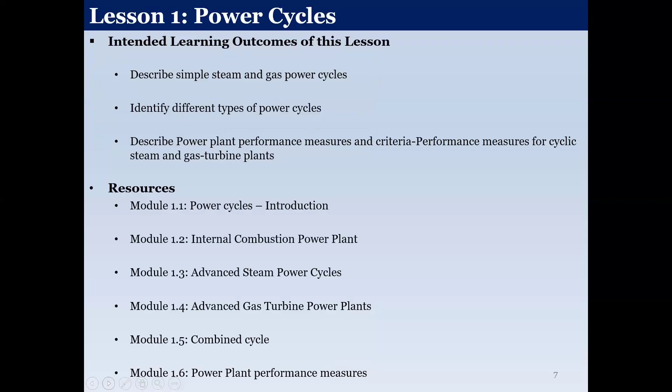And if you go to the learning outcomes, I don't want to tell you all these things again repeatedly. I think I have already told you about these things. So we'll move on to this one. Now here you have the first one, the power cycles introduction. You have all these things. If you go to this link, you will find something like this, and you have this arrow here. You can go to the next one and proceed from there, or you can see the course material.

Introduction to power cycles. Inside this, it's kind of a video, not really a video, but you can go slide by slide and see what is inside and then go to learn about the basic concepts, okay? So then moving on, here I think I have told you about these things also.

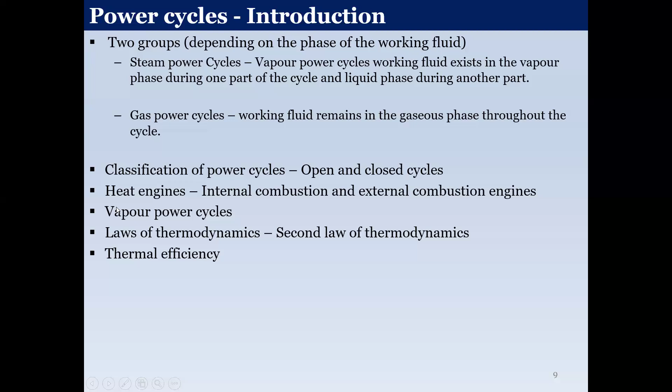And other than these two, we have heat engines. Now these heat engines, of course, I'm sure that you know what this internal combustion engine is. Again, some power-producing engines, and also external combustion engines are there. So we'll see what these two are. Then vapor power cycles and the laws of thermodynamics, as I said.

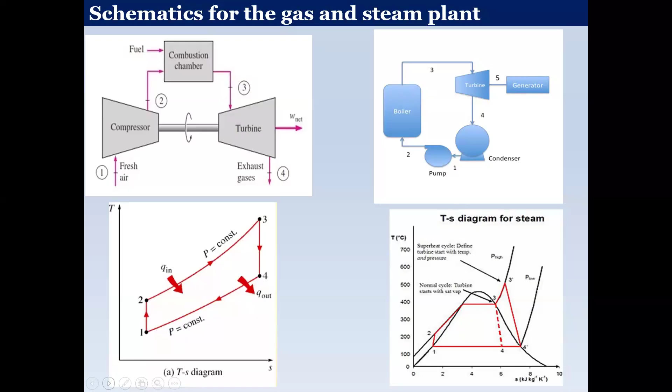And then here the steam schematic is also the same. You just cannot use water directly in this. You have to pump it; I mean, you have to elevate the pressure a little to go into the boiler, and then have the ignition. Then you have this in the turbine. You have this cycle. I'll explain what this thing is a little later. So hopefully you know about this one, right? The TS diagram, we'll see.

Other things, of course, are just like stories. You can go through them, and they are kind of like a story. You can read about them and find out how they work here, right?

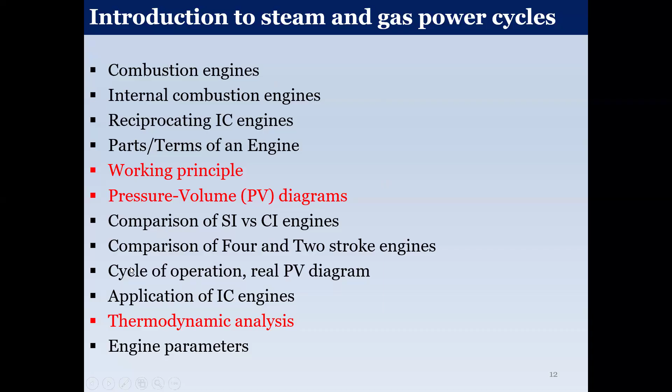Okay, so next is advanced steam power cycles. There again you have lesson 2. We'll go into that a little after finishing this lesson 1, because you have 6 modules there. I think you have enough material to study. So I will open lesson 2 at the end of this month, or I'll think about it, right?

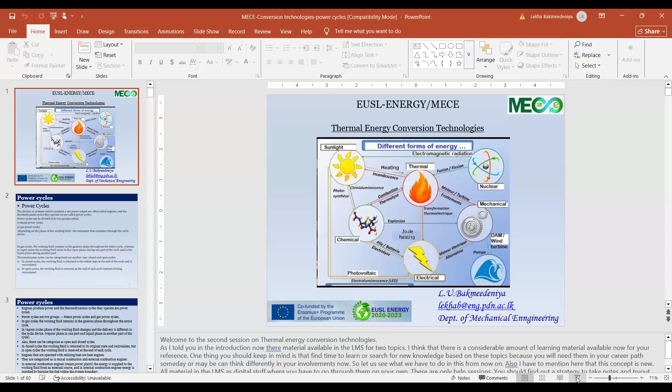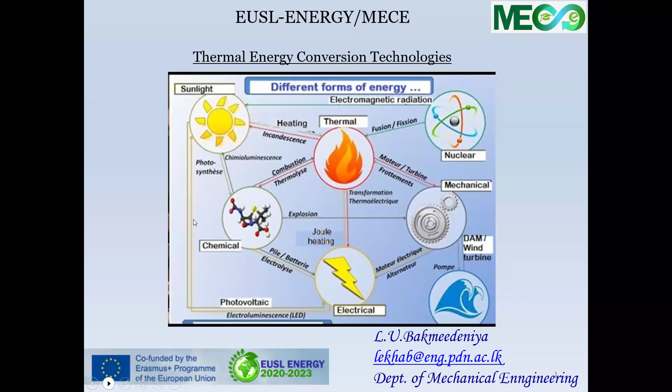All right, so let's move into the power cycles. Same theory - the basic stuff. I will just summarize; this is not a lengthy or very elaborate lecture, but you can find all these things in the LMS. I'm just covering some basic stuff here so that you can continue with your learning activity.

So, power cycles - I told you about steam power cycle and gas power cycle. The devices or systems used to produce a net power output are often called engines, and the thermodynamic cycles they operate on are called power cycles.

Now, when you say thermodynamic cycles, we have to talk about pressure, volume, temperature, and heat values. They depend on temperature sometimes, and we make a lot of assumptions when we want to analyze these cycles. You should clearly understand whether to use an assumption or analyze with the basic stuff, or analyze it up to the point where all changes are incorporated into the analysis.

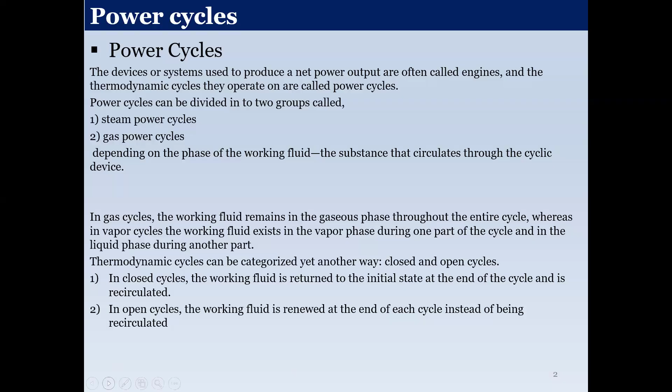Let's move on. So now I have given you a few bullet points about power cycles. I just told you that the engine produces power, and the working fluid undergoes these thermodynamic cycles. Power cycles have two categories - steam power cycles and gas power cycles.

In the gas cycles, the working fluid remains in the gaseous phase, but in the vapor cycles, it is changing its phase. Part of the cycle it is as a liquid, and part of the cycle it appears as a gas, in the sense vapor, right?

It can also be categorized as open and closed cycles. In the closed cycles, the working fluid returns to the original state, but in the open cycles, it is renewed at the end of it, right?

We'll see how that happens when we talk about internal combustion engines and gas and steam power. I hope you know these two cycles - the whole thing doesn't change into the initial state, right? So there are two engines.

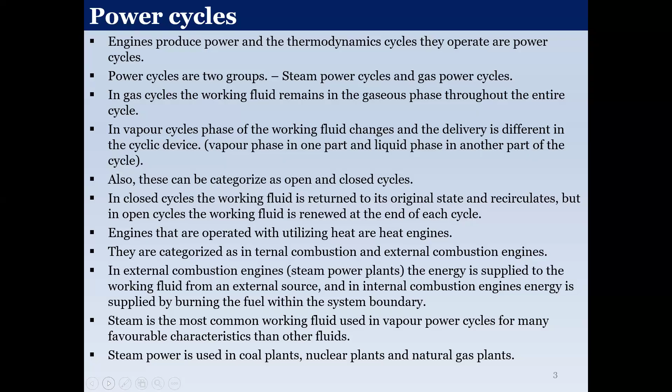So we'll see how you can incorporate your advanced learnings into your working or your career, right? Now these are the things that you have to remind or recall. The people who don't know about these things, please read about them and learn about it, right?

The zeroth law says that if there are two bodies, they are in thermal equilibrium. Now I hope you can understand what thermal equilibrium is, right? If one body is heated and the other body is not in that temperature, they will come to an equilibrium state. That is obvious, right? It's a very common thing that you can think about.

So we say it's the zeroth law of thermodynamics, right? I have given you two ways here also. You can see two bodies have equality of temperature with a third body, then they in turn have equal temperature with each other, right? Or else you can say two bodies are in thermal equilibrium if both have the same temperature, even when they are not in contact. Okay, so these two are a little bit different explanations, but they say the same thing.

The first law says that energy cannot be created or destroyed. Obviously, the energy content inside a source cannot be destroyed, and you cannot create any energy either. You have to change it into a certain other usable format. That is what the first law says. And the second law, of course, I have not written here because that is where we use a lot of things. So let's go into that one.

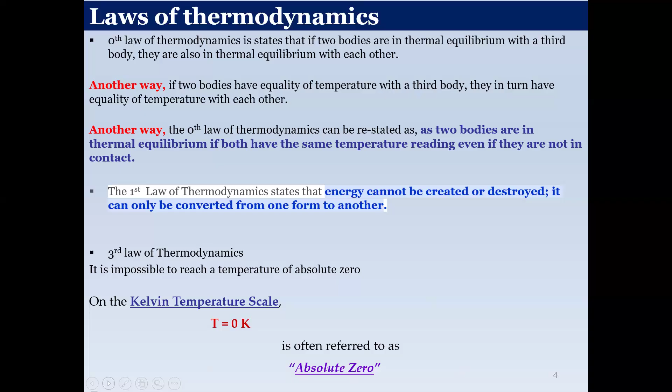So here, now the second law. We are coming into the second law. Now this is what we should know properly. Learn this very carefully and understand the basics, it is a very important concept, right?

Heat engines, you can see here, receive heat and then give heat out. Heat from this source you take into the heat engine, and then it sinks out to a low temperature sink, by giving you some work output.

Hope you can understand. So when you talk about this heat engine, second law, there are two statements. One is the Kelvin-Planck statement, and it says it is impossible to construct a device that operates in a cycle and produces no effect other than the transfer of heat from a lower temperature body to a higher temperature.

Now read this and understand. It should be from the high temperature source to the other one; the other way cannot be done. The work can be converted to heat directly and completely, but converting heat to work is not as simple.

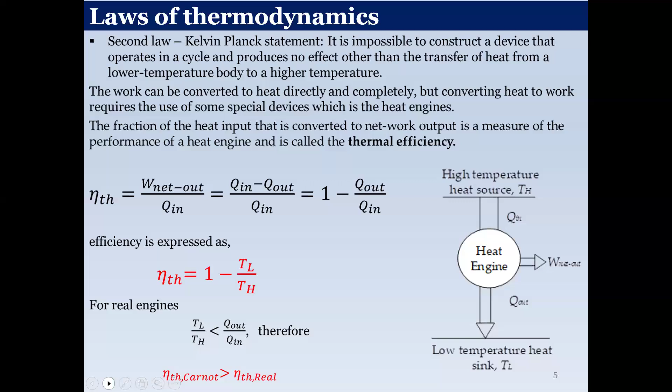Now this is what I told you, the reversible process. You can take the system and then take some heat out. The system undergoes some change such that the system plus the surroundings can be put back to their original state by exactly reversing the process. That is how you call this reversible process.

But on the other hand, I told you the changes proceed in infinitesimally small steps. You cannot convert it at once; it has to be in little steps, so that it comes to equilibrium in each state.

Now this is some kind of phenomena, a very common phenomena that you can even imagine. You cannot completely take a high temperature source into the low temperature source. So that is how you talk about this reversible process. In the other way around, it should be very slow, not like in this case.

Not like that you add heat and then go into the temperature equilibrium state, but here you have to reduce the temperature, and it should come to equilibrium very slowly. But anyway, if you come to the original state, you call that process a reversible process. Now these are things you have to learn in your basic thermodynamics, okay.

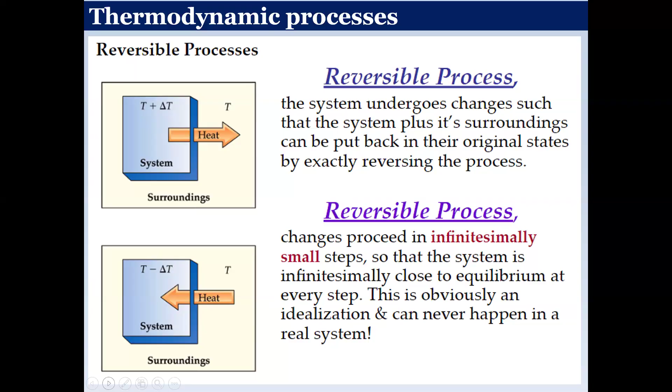Then let's go into some processes with some specific names. When you talk about these heat transfer processes, or the temperature-involved processes, you can talk about the isothermal process. Isothermal, the word implies that the temperature is constant. If you have a process where the starting temperature and the end temperature are equal, we call that process an isothermal process.

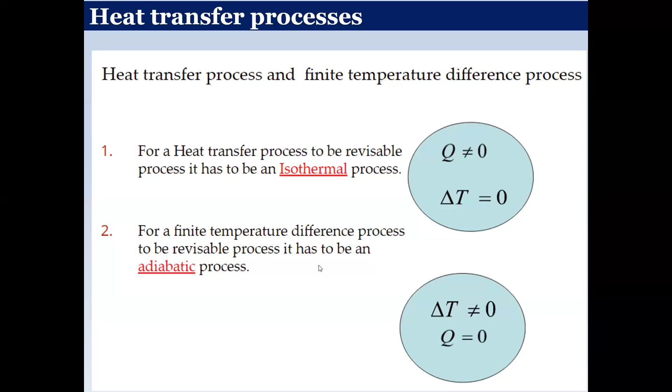And when you come to A level class or after a degree program, some people might have gone a little far from there, but people who know about these things, please help the others to at least understand this basic stuff, okay? Right. So we'll go into the next slide. Now we are going to learn about the steam power plant.

Anything that you didn't understand about the things that I talked to you about now? I think I talk a little bit fast. So if you cannot go through, please let me know, right? Okay. Okay. Yeah, sure.

So now we have the steam cycle. Now I told you, you have to have some kind of steam out from this boiler. A boiler is a closed vessel where it generates steam, right? So here, these diagrams, for water, you have these diagrams with temperature and entropy, and then you have some pressure lines. These are pressure lines.

Oh my god, what happened? My computer is giving some kind of problems. Okay, let's go into the beginning again. Okay, we were here. Now see, you wanted me to explain this one.

Now in the steam cycle, or in a steam engine, we have these four items. A boiler where you put the heat in, and then the turbine where you get the work out, and once you take the work out, there should be some low temperature sink for the remaining steam to condense. We use the enthalpy of the steam to take some work out, and then the exhaust steam will go out in a different stage, and you will have to have a condenser to condense this steam into water.

Now that can go into the pump, and you can pump that again into the boiler, right? To work this pump, you have to supply some work. Once you give some work, the water will rise in pressure, so that you get into this boiler elevated pressure, and once you supply some heat, it will increase the temperature and the steam will go into a superheated or heated stage.

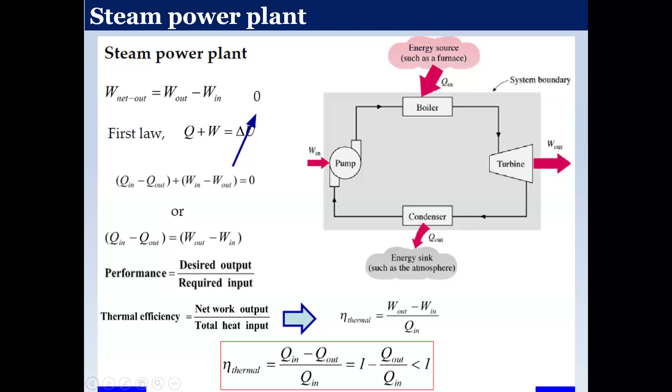So now this is the steam power cycle we talked about earlier. Here I told you this is the schematic of a steam power plant. Then you go into the system. Here you can see that you have a turbine, and you take the work out from the turbine, and you have the steam generation here using Q in from some kind of material, say maybe coal, maybe petrol or diesel or something like that. You have to somehow give some heat input here to generate steam, right?

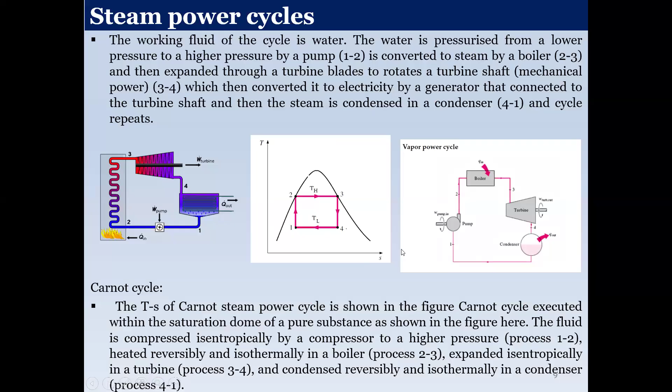Now I told you earlier, the ideal cycle is just a square or a rectangle, but the real cycle is not so. 1 to 2, you have to increase the pressure of the water which pumps into the boiler. Here you have to give in some work, and then you pump into the boiler, then you put some heat into it, then you generate the superheated steam with this boiler. Earlier I told you this is simple and easy to understand, without any inside details. In the turbine you have this 3 to 4, it reduces its temperature also and goes into this stage.

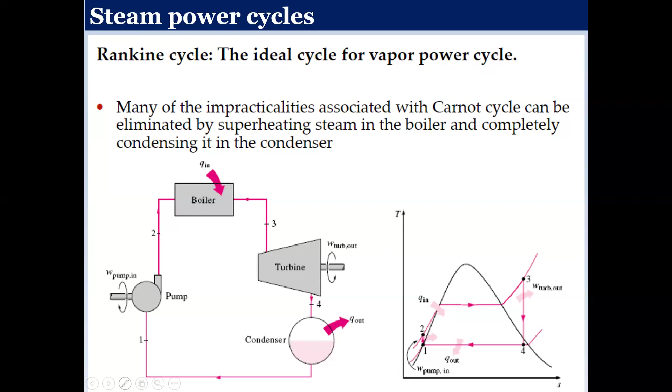Then you can analyze or you can calculate certain values to find out the performance of the steam engine. Got the point? Okay. Move on here.

The energy analysis of a Rankine cycle. Now see what we talked about in the steam. We are talking about this enthalpy. Okay, 1 to 2. Remember, this is usually a common diagram. These stages, when you say 1 to 2, that is referring to the pump. 2 to 3 referring to boiler operation. 3 to 4 referring to turbine operation. 4 to 1 again referring to the condenser operation and going back to the initial stage, right?

So this goes as a closed cycle. You can see it. Temperature also increases while inside the boiler, and it increases the enthalpy as well. So it comes to stage 3 where it enters the turbine and expands through the turbine blades and then gives some work output. While this expansion happens, this rotates and it will give you a work output.

Now see, actually I should not explain this in this detail if it is only that you have learned these things basically in the undergraduate stage. But here I'm taking a lot of trouble to tell you basic things because here it's a wide variety of basic qualification applicants. So you also will have to put some effort to understand how these things happen or how these analyses are done.

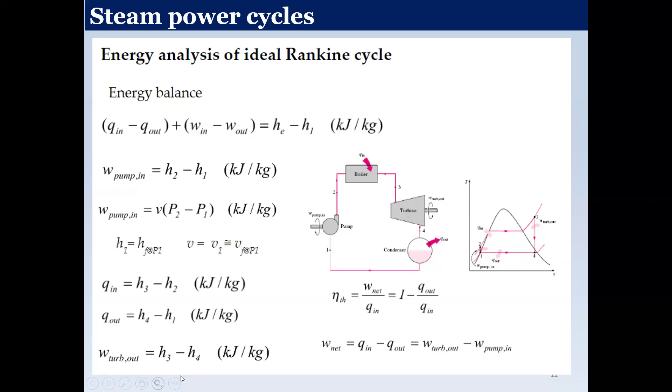And you have to know, in a steam power plant, the efficiency is less than 30 actually. It is very difficult. But if you talk about gas turbine and combined gas and steam, that will give you more than 50, right? We will talk about combined cycles a little later. Before that, we'll learn about steam separately and gas separately.

Then now here, I told you that the entropy changes in the real situation. But what we do here is we idealize, or we assume, in certain instances, that this entropy does not change. Then only this 1 to 2 is a straight line, and 3 to 4 is also a straight line. This is also a straight line. But in reality, you can imagine when you supply some heat, it is not remaining at a stage where the temperature is constant, right? So the real cycle, or the actual cycle, is a deviation from this.

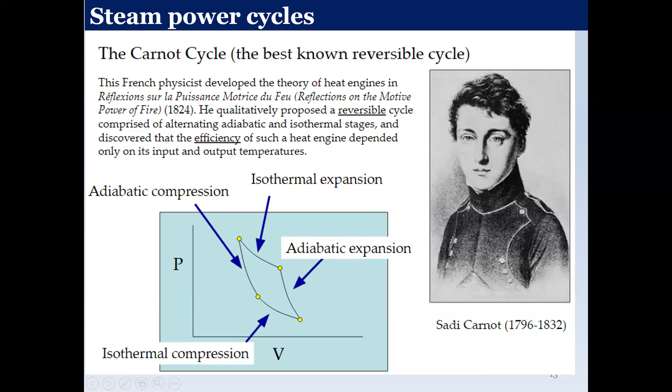Why not go to the internet and find out who Plato is, who Aristotle is, the great scientists or philosophers, right? It's very interesting. When you have time, read about them rather than the gossip you have every day. Not about all these politicians, actors and actresses, their lives, but you can read about scientists. I'm giving you some kind of a deviation, okay? Read about them.

Right. So here now we are indicating the same Carnot cycle in the steam power plant in terms of pressure and volume.

See this? In this, when you put this heat into that process 1 to 2, that process is QH. And that happens at a constant temperature. You remember we talked about TH and TL in the ideal Carnot cycle. So I don't have to explain this again. I told you here the only thing is pressure and volume. The two axes are pressure and volume.

Here the same thing, Rankine cycle. I have already told you about this. So here in an isothermal process, heat is proportional to temperature. When you increase the temperature, it gives you more heat. That is obvious, right? So the Carnot efficiency is this one.

If it is not the Q, the heat input and heat output, or work output and work input, then you can talk about these two temperatures. Thermal efficiency will be anyway the net work output over the heat input that you give into the system. So now you have four processes, 1 to 2, 2 to 3, 3 to 4 and 4 to 1. You can simply write it like this, m dot into either enthalpy difference or pressure difference.

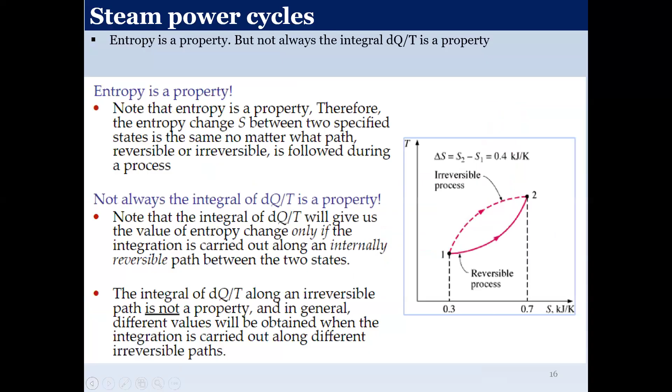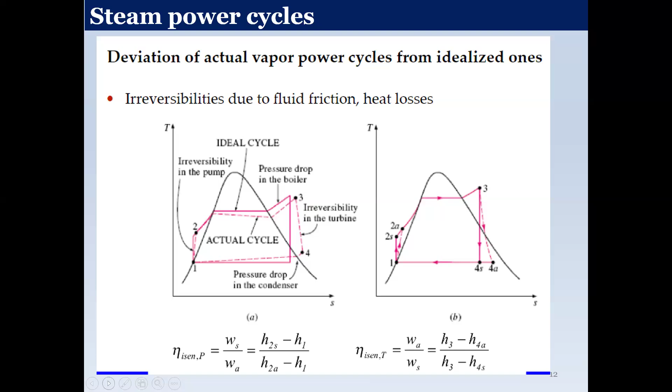Well, I hope you can read about it, and this is what I can explain.

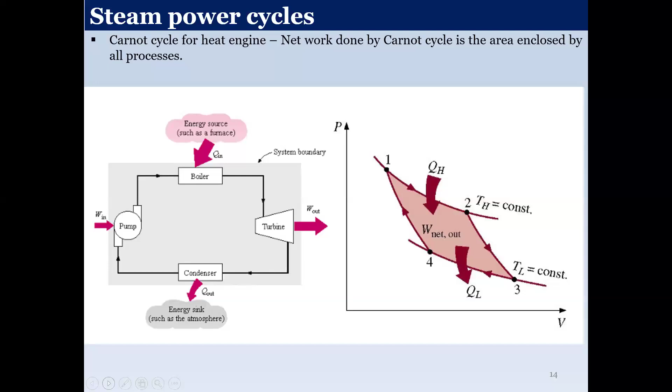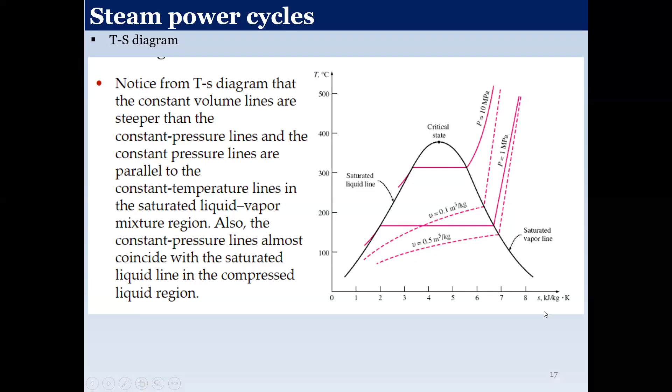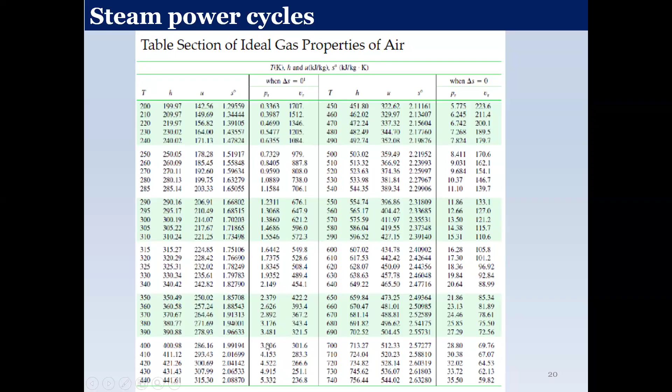So about this I told you, and you can see the air properties. Now this is not steam properties, this is properties of air, ideal gas, right? Not steam. You will find steam tables also something like this. When you have temperatures and pressures, then you have other properties according to two properties. Now this is not steam, I just want to show you the standard values that you can find, or the available sources where you can find all these values.

Okay, isentropic in steam power cycles, again you go to isentropic compressions. Now this is isolated events. We have a compressor, we supply some temperature, some pressure, certain gas or something to the compressor in a low pressure, and while compressing it increases its pressure and temperature both. Compress means you are reducing the volume.

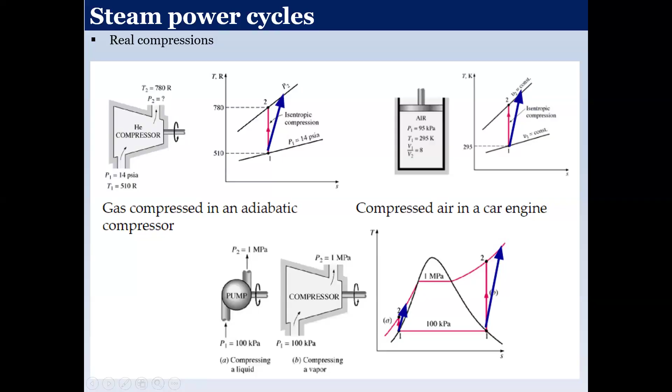Okay, so this I just put for you to understand between two pressures, because here temperature and entropy, if you know the temperature and entropy, you can locate this on the diagram, the pressure line, on the constant pressure line, and then you can find out what this is. In the process also you can find other things, because if you know the last stage, then you can find the other things as well. So just for your information, I am giving you this.

Shall we stop at this point? Or may I go through this quickly, gas turbine also? Okay, gas power cycles. Now we talk about steam power cycles all this time. Can I continue? But I think I have a lot of slides here, right? Well, we'll see what we can do here.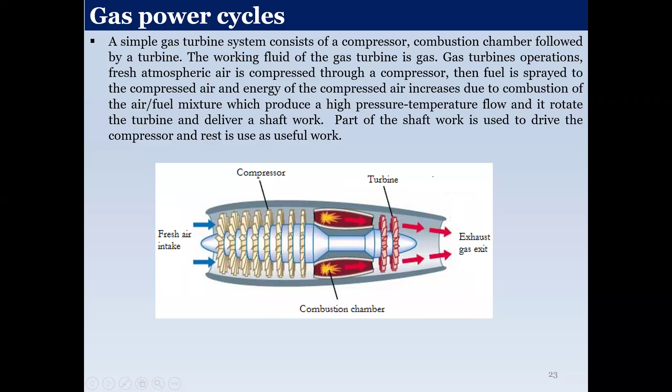See the gas turbine. Now, when you talk about gas, not like steam, you will have to have some standards or some assumptions, right? These are called air standard assumptions, and there's another one called cold air standard also. So you see, now these three are very easy to understand.

Gas power cycles, that is spark ignition engines, diesel engines, conventional gas turbines - all these things, the working fluid is gas. That is one assumption, the air standard assumption. In these engines, the working fluid is gas. And in all these engines, energy is provided by burning the fuel within the system boundary. Inside the system only, you burn this fuel or this air-fuel mixture.

The working fluid, air, mainly contains nitrogen and hardly undergoes any chemical reactions. Now, when you talk about environmental or fresh air, it has a lot of components in it - oxygen, nitrogen, hydrogen, sulfur, maybe all these things, it's a composition. But usually we say it is mainly nitrogen, about 79% nitrogen. So that is what we take as the working fluid. It doesn't undergo any chemical reaction inside the system - it is just compressed, then ignited with the fuel, and then expands in the turbine.

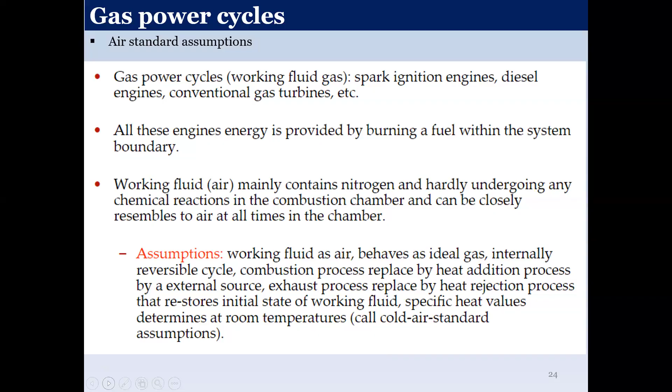Now we go into the compression stage. Compress means you take some air at a certain pressure and then you reduce the volume - you have a volume, compress means you compress it to a smaller volume. In that case, to compress the volume, or to reduce the volume, you have to increase the pressure. You can remember this process: PV to the power K equals constant, and here you get T constant, PV constant.

You remember this if you remember your mathematics - this analysis, or the behavior of this one, is the integral of specific volume with respect to pressure change. Pressure changes from 1 to 2, and there are 3 compression stages we are talking about.

One is isothermal - isothermal work is where the temperature is constant, and the polytropic is where this n value, this k value, is in between 1 and k. When n is equal to k, we call it isentropic, that is entropy is constant. Now here you see this is pressure and volume. Now in gas cycles, you have to talk about these 4 processes: compression, expansion, and other 2 - we'll look at it in the next slide.

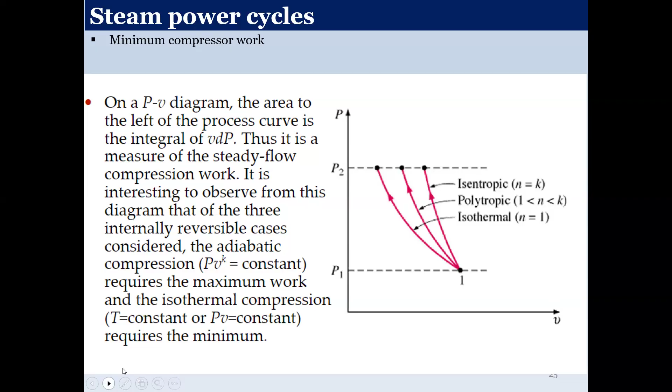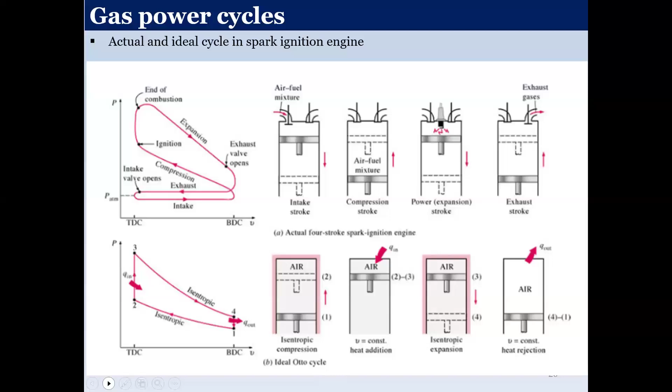Gas power cycles. Now again, there you have actual and ideal. Spark me - I will stop at this point rather than talking. Do I have to? Oh God.

I'll go to this one, right? Internal combustion engine. I'll keep that for a while because they are diesel and Otto. Okay, we'll go into this one. Gas power cycle. Okay.

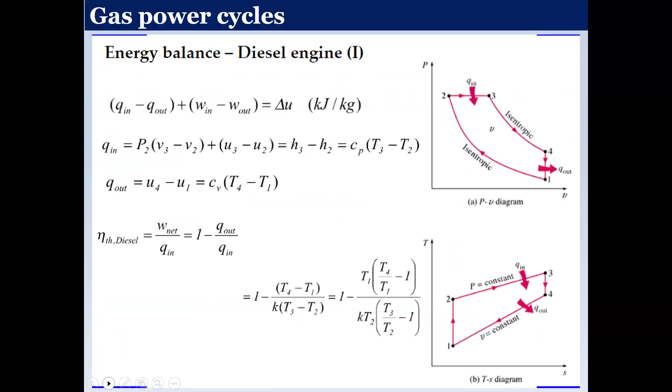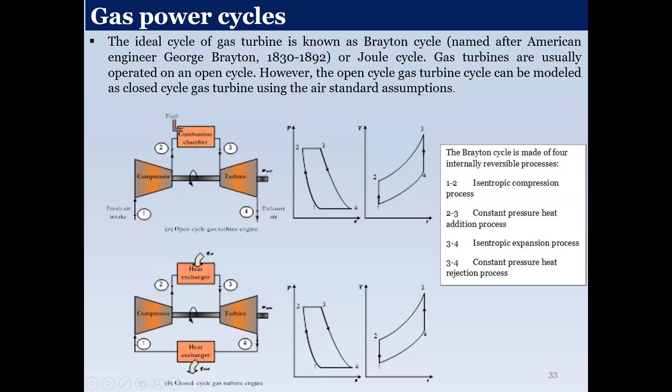Now see these 2 diagrams, how it is indicated. Even though you put a heat exchanger here, these 4 processes of the Brayton cycle remain the same. Constant pressure heat rejection process: the heat is put out to the environment or to the heat exchanger. So here the simple ideal Brayton cycle, like in the steam cycle. This is the ideal case because entropy is constant, but you can talk about changing entropy for the real case; usually we take the ideal case. Isentropic compression, constant pressure heat addition, isentropic expansion, and constant pressure heat rejection, shown in the PV diagram and the temperature entropy diagram.

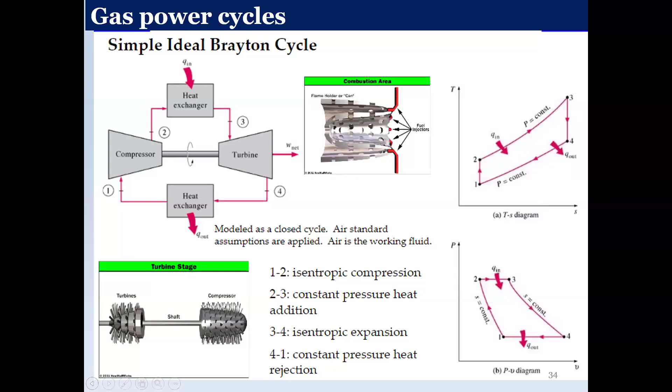Again, you can simply analyze this with equations like this. The energy balance, you can read about this one. Q in minus Q out plus work in minus work out is equal to the enthalpy change in the system. For the heat input, you use the same notations 1, 2, 3, 4, and for the 4 processes you can write these equations. W in is equal to this much, W out is equal to this much. All these you can express simply using the enthalpy, but here the pressure changes are taken into account.

Thermal efficiency under the cold air standard assumption: you can express temperature using pressures with the K value. Usually we give the ratio of pressures, like earlier we talked about the volume ratio, right? In the compression stage, you have the final and initial volume. You can talk about the ratio of volumes as well as the ratio of pressures, and we call this rp. These rp values are given in tables also if necessary.

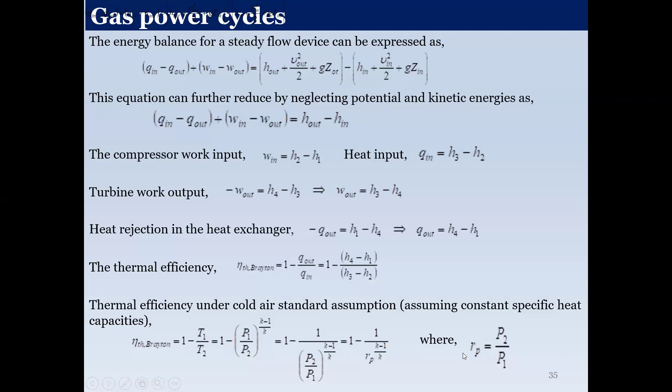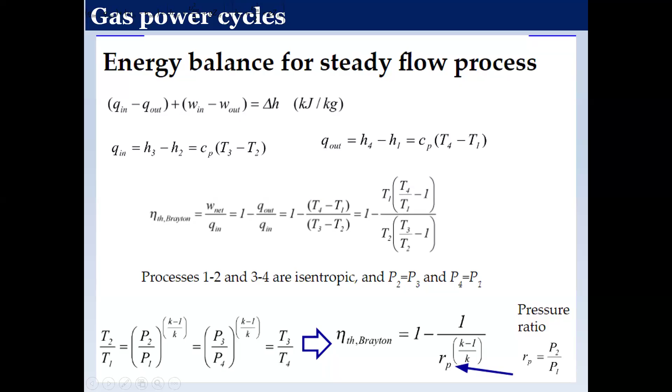If you cannot find other properties, you can use this one to locate the other position in an ideal gas turbine. Now, I don't think that I have to explain all these things. This is simple mathematics, because I talked about Cp and Cv values measured at room temperature. So enthalpy is, here it is for a unit mass flow rate, but if the mass is incorporated, then you have to put m here, right? So I am not going to explain all these things. I hope that you can understand this one. If not, please let me know.

Now, as I told you, we were talking about the ideal case or the constant entropy process, but here also the entropy changes and the temperature changes. Usually we assume that we can talk about these pressure lines as the same line rather than changing little pressures, or this ideal case can be taken with the assumption that it is constant pressure, right? But in the real case it is not so.

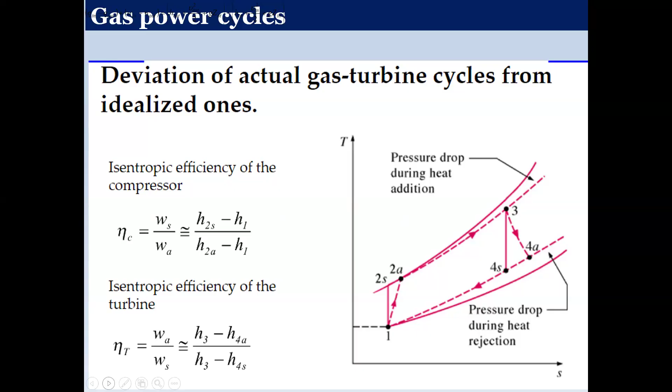If you take all those things into account, it will be a little complicated, but if it says that entropy changes from here to there, then you have to incorporate that rather than the pressure changes, because the pressure ratio is also given, so you can think about how these things are taken into account when you analyze a gas power cycle or steam power cycle. Similarly, right? Now I will stop at that point.

Combined cycles, we'll talk about in another lesson, because the combined cycle is very important. When you talk about cogeneration and polygeneration, we have to talk about a lot of things in combined cycle. In the gas turbine, I told you the exhaust gases out from the turbine are at very high temperature. You can use that high temperature exhaust gas in a steam boiler or heat exchanger, where you pass water and take superheated steam to turn another turbine, so that you have a combined efficiency. This is the combined cycle: gas cycle and steam cycle combined using a heat exchanger, which we call a heat recovery steam generator.